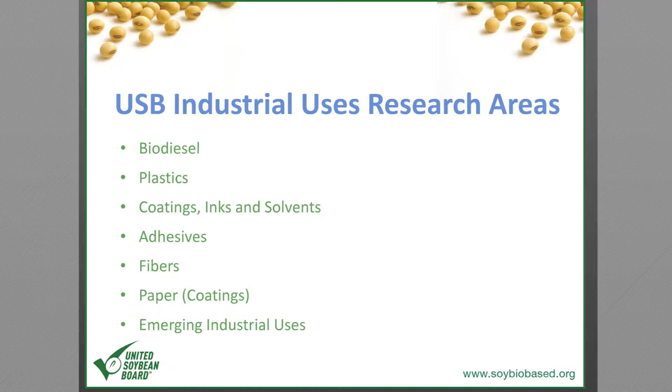We're always looking for new thoughts and new ideas on how we may spend checkoff dollars and bring new products to the marketplace in the future. We've always looked at our organization as having a portfolio. We're looking at a lot of different things, not spending all our money on one item, and we've been successful in many.

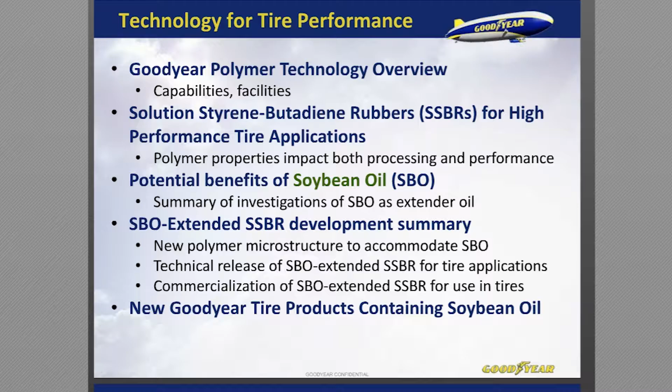I'll talk about the benefits of soybean oil, some of the unique properties that soybean oil has, and how we were able to leverage them throughout the development of a new polymer product and the subsequent introduction into some new tire products from Goodyear.

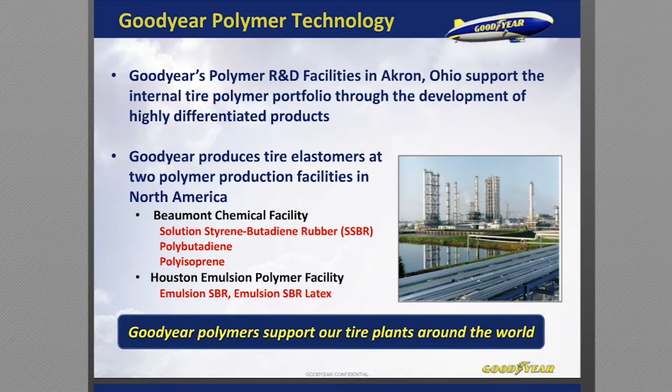As Mike mentioned, I'm Chief Engineer of Polymer Science and Technology, the tire and rubber part of the Goodyear Tire and Rubber Company. We have R&D facilities in Akron, Ohio, and we support some of our polymer plants here in the United States. We have a solution polymer plant in Beaumont, Texas, and an emulsion facility in Houston, Texas. Here we develop and produce polymers that support our tire plants around the world.

Focusing specifically on styrene butadiene rubbers, these polymers are very prevalent in our tread compounds. We have a portfolio of products to serve the global tire market. Every region, every application has different needs and performance requirements, and we're able to develop technology and tailor our materials to meet a full range of tire properties. The use of specialty polymers is ever expanding in the consumer as well as the commercial realm.

One thing that really provides benefit in ultimate properties is high molecular weight of various polymers, and this is where the use of oils and oil extension allows us to process these high performance materials.

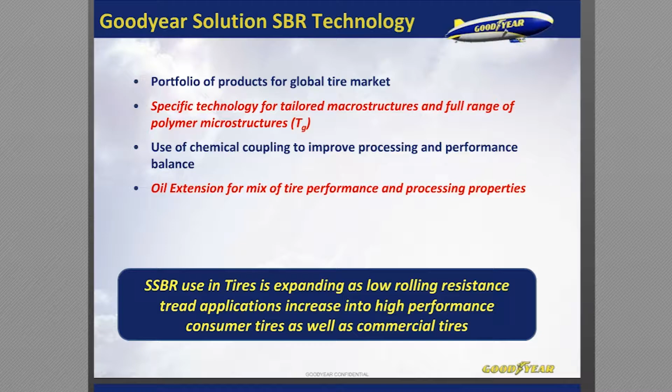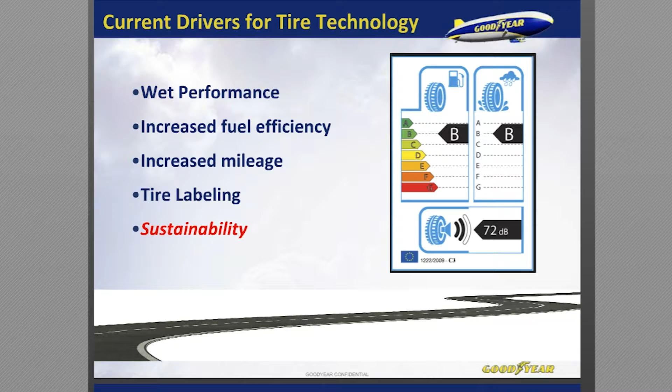In North America especially, we really value treadwear, so there's always a balance of performance that we're trying to achieve. Certain tire applications require more of a focus on one specific technology, and you can see on this list we also have sustainability there. Sustainability is not lost on us. It is very important, something we pride ourselves in, but you can see the overall focus we have on tire performance for our customers.

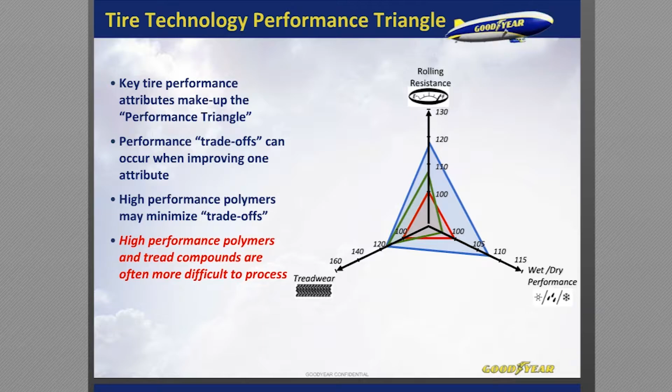And these high performance polymers that we develop are a big part of that. The only issue with these high performance polymers, whether they're high molecular weight polymers or functionalized, is that they are often more difficult to process. So there's always that balancing act as well.

So that's where oil comes in. As I said, high molecular weight polymers, high filler loadings to increase wet traction - all these things we use to improve our tire properties come at a cost of poor processing. So what do we do? We use oil.

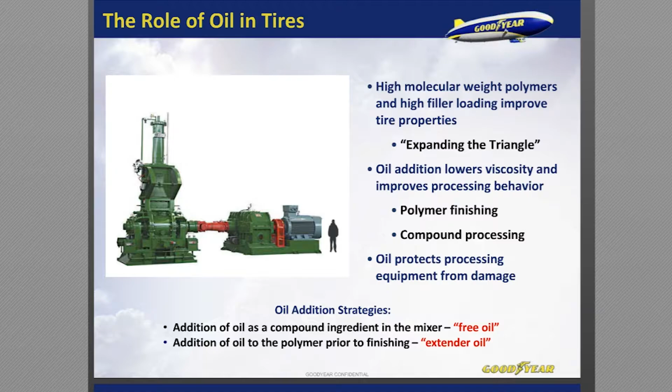Oil addition lowers the viscosity, whether it's the viscosity of the polymer during finishing or added to the compound as an ingredient. There's really two addition strategies. When we add oil just as an ingredient to a compound mix where we're adding filler, different rubbers, and other additives, we add oil directly to the mixer - that is considered free oil. Then we add oil to either polymer cement in the case of solution polymers, or to latex in the case of emulsion polymers, prior to finishing. So basically for solution polymers, it's where the solvent is removed, and that is called extender oil.

So why soybean oil? Why are we looking at this? Why have we continued to develop around this material for the past couple of years? It's appealing because it's domestic, abundant, and renewable. That at least got us looking at it for sure. The sustainability factor was big. In our early development efforts, we started looking to see if soybean oil possessed the key attributes required of extender oil. Thermal stability is obviously a big one - if it didn't have adequate thermal stability, it wasn't going to go anywhere.

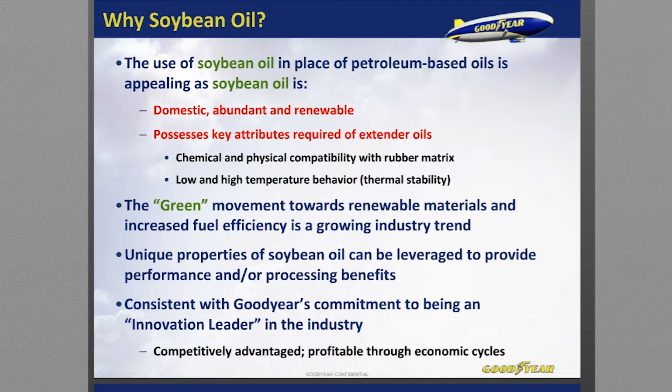And then the physical and chemical compatibility with the rubbers that we use in our tire compounds. The green movement is a growing industry trend, but in the end, it was the unique properties of soybean oil that we were able to leverage to provide a nice balance of performance and processing. This type of innovation is consistent with Goodyear's commitment to being an innovation leader within the industry, which keeps us competitively advantaged and hopefully profitable through various economic cycles.

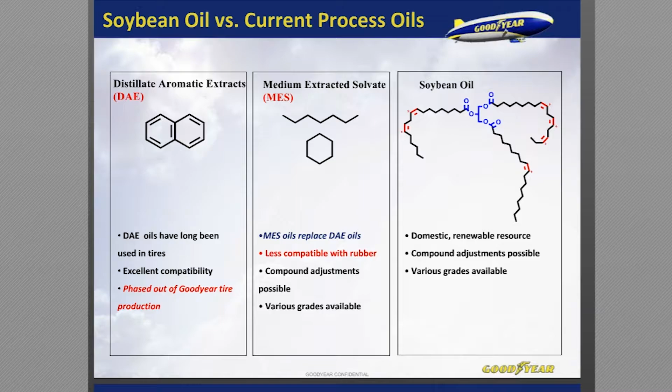Here is a brief overview of the types of oils that are used. The aromatic oils have been phased out over time, so the majority of our oils are these medium extracted solvate, heavy naphthenic type oils. You can see just hydrocarbon oils versus soybean oil, which is obviously a triglyceride - a domestic, renewable resource. The soybean oil we are working with currently is just conventional soybean oil.

Some of our early work was focused on looking at the compatibility of soybean oil with our tire polymers, specifically styrene butadiene rubbers, or SBRs. And the one thing we realized right away was that it had better miscibility - soybean oil was more miscible with SSBR than the current oil we were using.

This is big for us, whether it's as a polymer extender or as a free oil addition - we needed less soybean oil to provide the equivalent viscosity reduction, polymer extension, however you want to put it. But basically, we got to use less soybean oil on a parts level than petroleum-based oil. That's big. It gives us a lot more flexibility in the design of our polymers and in the formulation of our compound recipes.

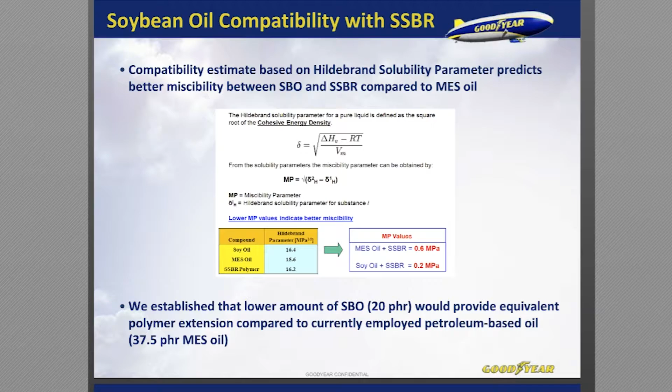What else is unique about soybean oil? Well, since it's a vegetable oil, it's a triglyceride. The glass transition temperature is far lower than traditional petroleum-based oils. The glass transition temperature is the temperature at which a material goes from amorphous to glassy, from rubbery to glassy. So obviously the lower the glass transition temperature, the softer the rubber will stay at these very low temperatures.

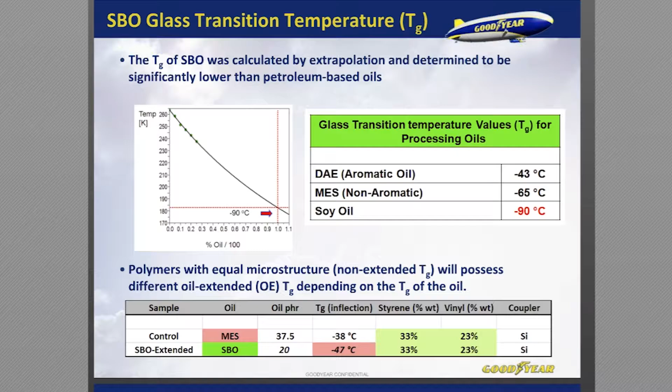Here's a quick comparison of an identical polymer microstructure. We took this commercial polymer cement and added oil to the cement, and you can see here in this TG inflection column a significant shift in the glass transition temperature of the extended polymer when petroleum-based oil was substituted with soybean oil. So why is that important?

Well, what we could do is alter the polymer microstructure to accommodate soybean oil. So what does that mean? We have a current inline commercialized styrene butadiene rubber that is extended with petroleum-based oil. It has a glass transition temperature of -38, and that's all important in our compound formulations, how we put everything together. But glass transition temperature is very important because that really gives us our wet rolling resistance and our wet winter balances in our tread compounds.

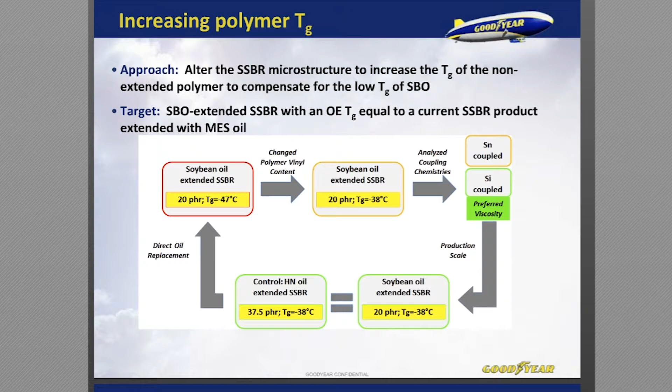Starting here at the bottom left, you see our control polymer, a direct oil replacement, which really shifts the TG. Then we did some polymer development work around it to get the same composite TG, only extended with soybean oil. So what does that do? It basically allowed us to combine a high TG polymer that would be good for a wet application, but given the extremely low TG of soybean oil, we're able to balance our properties a little bit better and make a unique material.

In August of 2014, we achieved technical release of this material, basically showing equivalent performance to the inline, but with noticeable improvements in processing, and that's due to the better miscibility of soybean oil with the rubber.

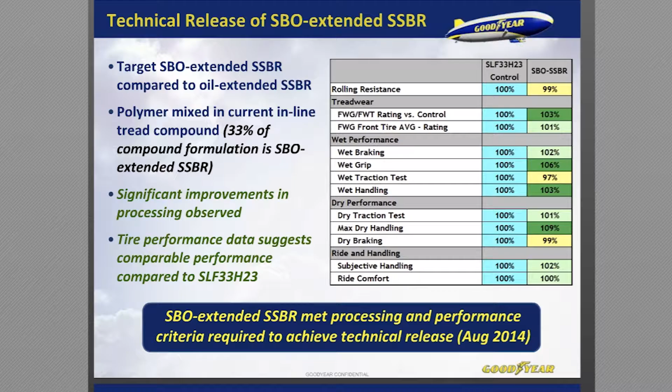We started looking at that material in new product developments. It was an iterative process. A large team was involved with it, cross-functional efforts. But in the end, soybean oil, the combination of the low TG soybean oil with the high TG rubbers, basically allowed us to alleviate the typical trade-offs you get for wet performance and winter performance.

The reason why high-performance summer tires perform so well in the summer on your sports cars and things like that is that they're very soft compounds. But those soft compounds have a very high glass transition temperature, so that in the wintertime when it gets cold, that rubber gets hard and brittle. It's not as pliable, and you don't get your winter traction.

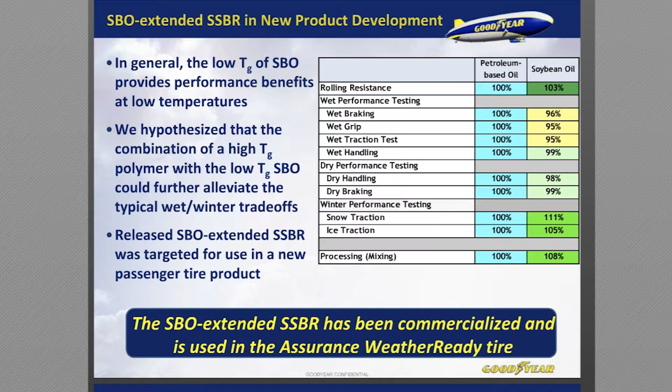Here we were able to achieve both simultaneously, and we were able to use our released soybean oil extended polymer in the Assurance WeatherReady tire. Released last year, the Assurance WeatherReady tire contains a soy-based compound where 100% of the petroleum oil was replaced with soybean oil in the tread compound. That leads to a total petroleum oil content reduction of about 60% compared with a predecessor tire.

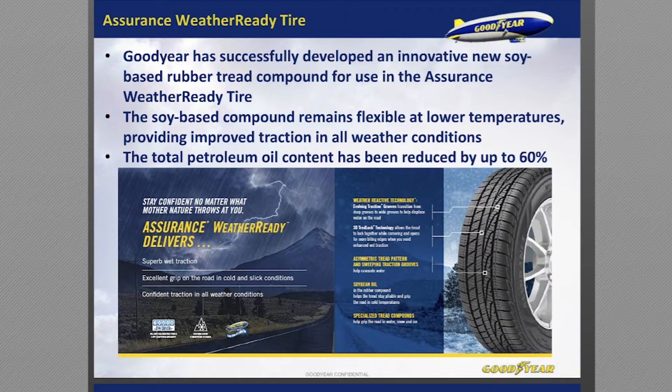Our soybean oil initiative actually won Tire Technology International's Environmental Achievement of the Year. This was an award that we received in February for our work with soybean oil and the development of the first consumer passenger product containing soybean oil.

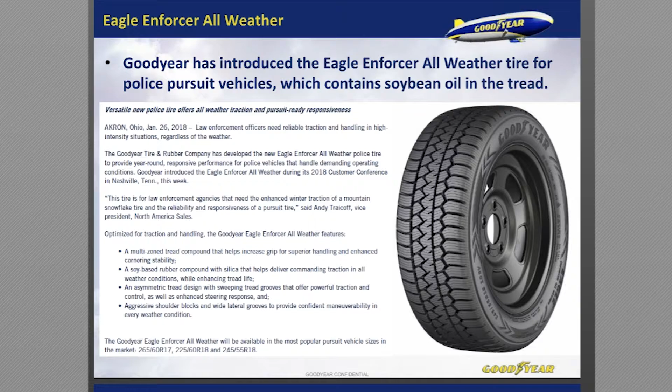About a month ago at our customer conference, we introduced the Eagle Enforcer all-weather tire. This is a police tire for pursuit vehicles, and this should be released later this year. This is another tire where we're looking for premium all-weather traction for our officers of the law. It's vital, all-season performance, and once again, soybean oil was chosen as an enabling technology.

So, in conclusion, we've commercialized 2 new tire products in the past year or so containing soybean oil. The unique properties of soybean oil were leveraged to meet our performance goals, and there are other ways that we're currently looking to leverage soybean oil as well.

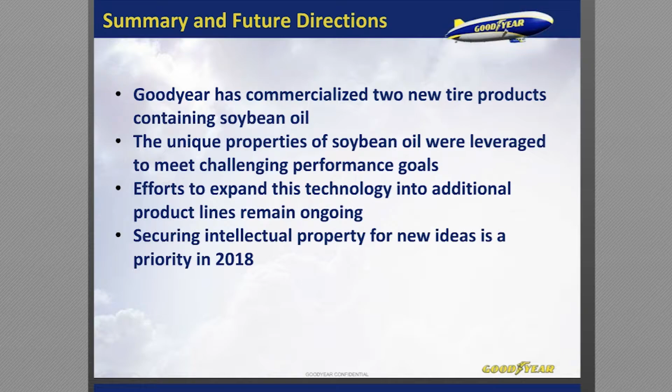It's not just for the wet winter balance. That's how we did it the first time, but so far we're very pleased with the performance of the WeatherReady tire, and we're continuing our efforts to expand this technology into additional product lines. We are in the process of trying to secure some intellectual property for some new ideas this year. We've got a lot of new ideas. There's a lot of work being done right now to really carve out our IP space.

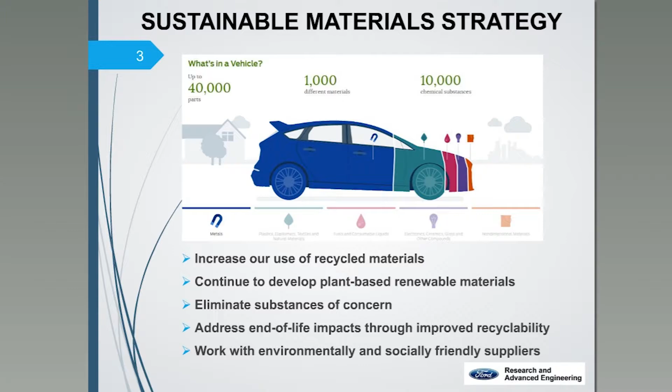With that in mind, how many different materials we're using, we're always looking for ways to increase our use of recycled materials. We want to develop plant-based renewable materials and incorporate those into our parts and onto the vehicle. We certainly want to eliminate substances of concern, heavy metals, etc. We want to address the end-of-life impact through improved recyclability of as many components as possible, and then work with environmentally and socially friendly suppliers.

So it's not just the vehicle itself. We look at the full supply stream and the manufacturing stream, going back all the way to things like mining and the production of raw materials, how we're looking at materials and fuels, how we fabricate, how we actually manufacture, and how we can minimize our impact there.

The vehicle assembly, that includes vehicle assembly as well as the parts and components. How the vehicles are used and maintained, things like oil changes and minimizing the amount of waste produced in that process. And then end of life with recyclability.

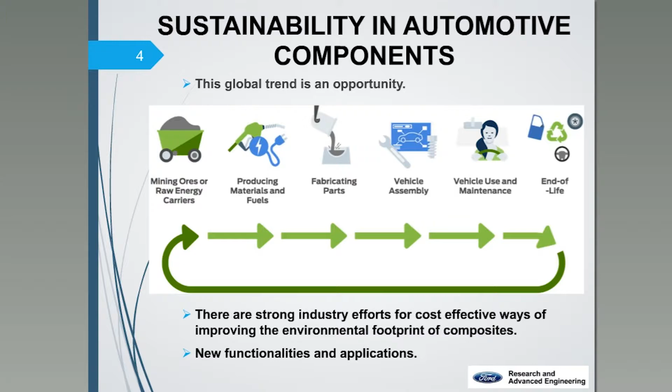We have made huge strides in water usage at our assembly plants, as well as reduction in waste streams. We try, as often as possible in areas such as the stamping plants, to recycle materials called offal, which is the excess material from a stamped part. We try to recycle all of that kind of material. So we're always on the lookout for ways to improve our environmental footprint.

Oftentimes, especially with renewable materials, we find those are also lighter weight, and whenever we go with a lighter weight component, that helps with fuel economy and also improves the sustainability, or sustainable performance, of our vehicles. So on average, Ford is currently using, depending on the vehicle, 20 to 40 pounds of renewable materials. Some locations where we've had great success have been soybean oil-based foams, seals and gaskets. We've used castor oil-based PA11 and foams, and natural fiber reinforced plastics.

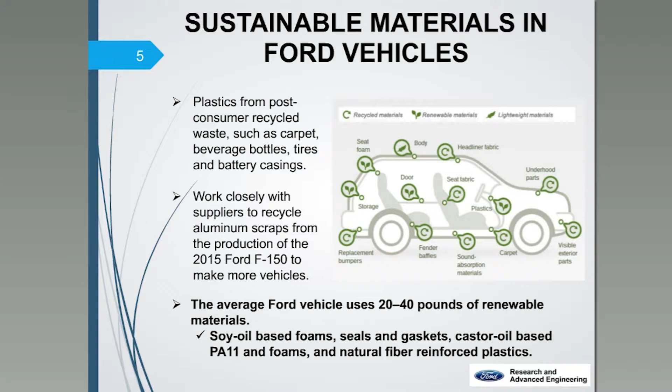So as we try to incorporate some of these very new materials, there's a lot of challenges in terms of performance. It always has to meet the performance expected of the customer and durability. So we need to look at all of our engineering specifications to make sure it's performing properly when we incorporate these new materials. Appearance is one.

Odor is another big one, particularly in the interior cabin, and any volatile compounds that might be off-gassed. The performance strength—there are certain key areas where we have to have good impact, or the part needs to be very stiff, and we can't sacrifice any performance in those regions.

We make vehicles all over the world, so it has to be globally available, or we find various alternatives that are globally available. Moisture sensitivity is another—sometimes sustainable materials take up moisture, so we have to be careful on where we place those materials.

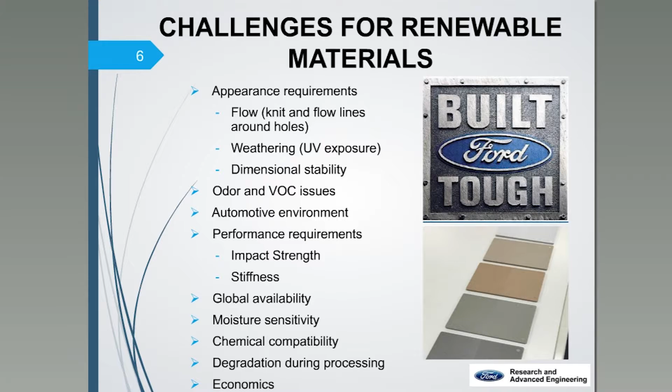Chemical compatibility—many of our parts on our vehicles are exposed to fuels or other chemicals, even people's oils on fingers, etc. So there has to be some chemical compatibility depending upon where the part is being used. We need to make sure as well that it's economically viable and doesn't add to the cost of the vehicle.

Some of the challenges that we have for recycled materials is really the fact that currently there's not a great market for many of these recyclates, and that's part of what we're trying to do—find ways to incorporate some of these recycled materials back into our parts in very specific locations and create a demand for those particular materials.

There's also the economics. There's some raw materials that are so low cost, particularly with lower gas prices or petroleum oil prices currently, that it's really hard to replace those materials with a sustainable recycled part. We expect that will probably change in the future, so we're doing all of our research right now to be ready to incorporate those materials when the economics make that a valuable opportunity for us.

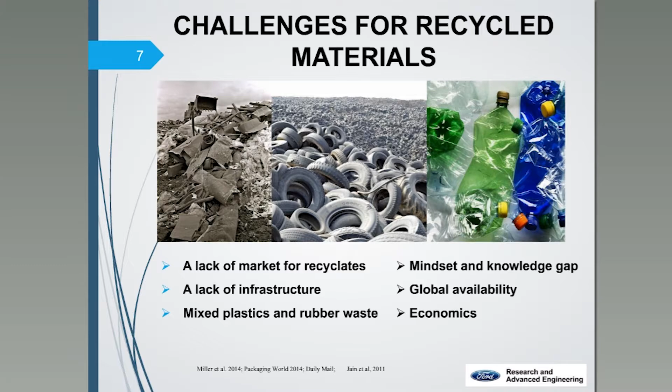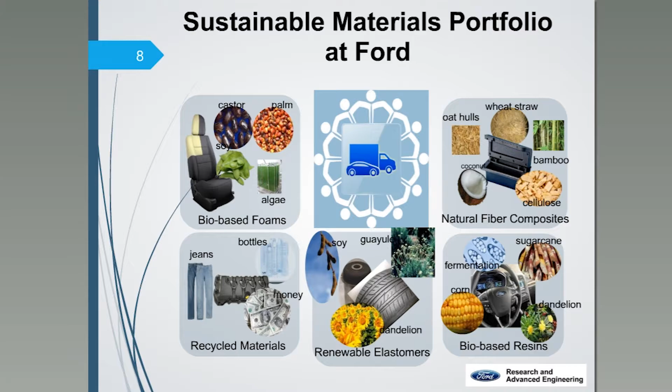Renewable elastomers—we've been looking at dandelion rubber, guayule rubber, and soybean oil, as well as many others that I'll mention in a moment. And then the bio-based resins, looking at different fermentation, CO2 capture for fermentation, sugarcane, corn, dandelion.

So let's talk a little bit about Ford Motor Company's use of soybean oil. We have a very long legacy with soy. Henry Ford was our founder of Ford Motor Company. He really wanted to make that connection between farmers and manufacturing, and so he worked very closely with the local farmers here in Michigan, and really wanted to promote the use of soy.

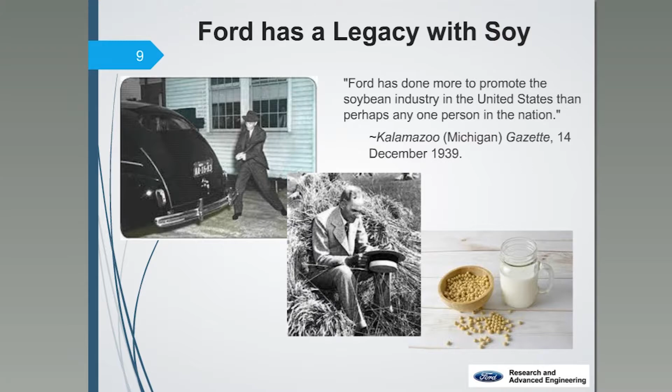Really making the point that you can use this kind of material in manufacturing. The second picture is Henry Ford—he's actually wearing a soybean suit, and he really experimented quite a bit with a variety of different products and how to use soybeans, and was a big promoter of this.

And then what materials have we used here at Ford, and what successes have we had? As Mike mentioned at the beginning of this webinar, the soy-based foam has been the biggest success that we've had with soybean, and we anticipate seeing more of that.

As first OEM, meaning original equipment manufacturer, we led the way in the production of seat foams, and all of our North American production seat foams are made with soybean oil, and 75% of our headrests as well. Then we've used soy foam and recycled tires and gaskets for 14 different vehicle platforms. This has diverted more than 5 million pounds of petroleum out of our vehicle production, which we take great pride in.

We want to make sure we continue to do that kind of work, reducing CO2 emissions as well. That's why we want to continue to promote these kinds of products.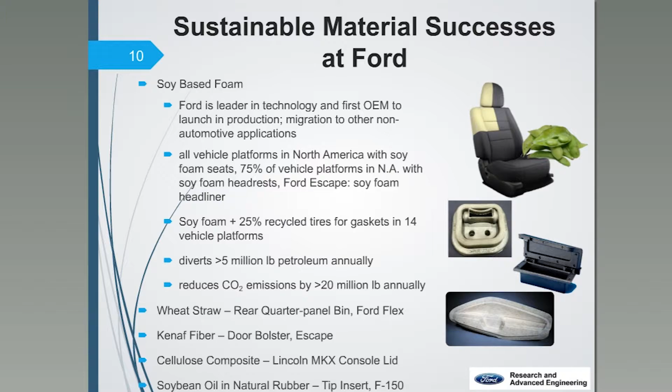We've also incorporated wheat straw into some bins on the Ford Flex, kenaf fiber into bolsters on the Ford Escape, and cellulose composite on our Lincoln MKX console lid. Most recently, we've had our industry first use of soybean oil in a natural rubber part. It's a tip insert on the F-150, otherwise known as a slat pad. I wanted to walk through how we got to that point using this material in that particular part.

Elastomers, rubber—we use those two words interchangeably. I wanted to point out all of the different places where elastomers are used. There's a variety of different types of elastomeric material: natural rubber, EPDM rubber, styrene butadiene rubber, which Bob mentioned, butadiene rubber—many different types of rubber, and they're all over the vehicle.

Oftentimes it's better when people don't notice it, because that means the rubber's probably performing really well, since they're usually in hidden locations you don't notice—seals and gaskets, engine mounts, suspension bushings, hoses and tubing, splash shields, obviously tires. That's the glamour side of elastomer use, door seals and that sort of thing. The average vehicle has about 9 kilograms of EPDM rubber and about 3 kilograms of natural rubber, just in non-tire applications.

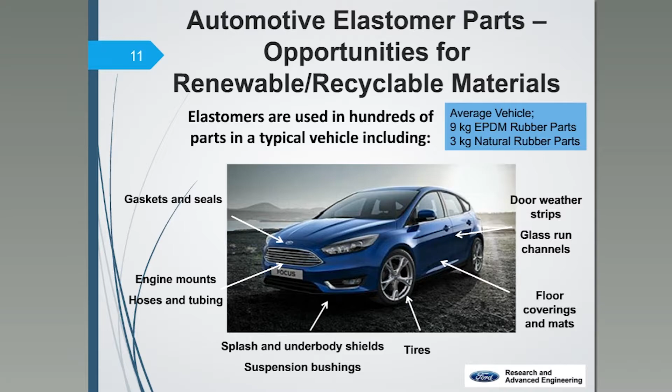This gives you a better picture of some of these natural rubber parts. You can see this rubber is often used when you have two metal components, and you put the rubber in between those two metal components so it provides a smoother ride of the vehicle. There's a lot of dynamic stress on these parts, different frequencies, etc.—suspension mounts, engine mounts, isolators, roll restrictors, bushings, and those kinds of things.

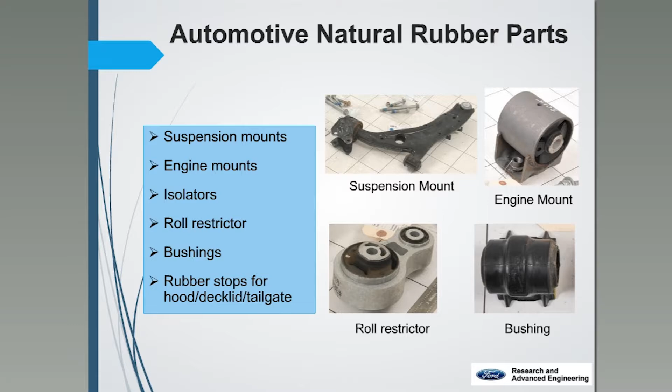When we talk about rubber, it's not just the rubber itself—there are many ingredients that go into making it. We'll start with rubber, the base material, which allows the part to deform and then recover back to its original shape. Bob mentioned the oil, which is important in processing the rubber—it helps with mixing and controls the final hardness of the rubber compound. Another key component is the fillers, reinforcing the rubber, giving it strength, improving wear, and giving the compound its physical properties.

Sulfur is also used, helping to cross-link the rubber to improve stiffness as well as the temperature range of operation. You might have heard of vulcanization—that's what's happening with the sulfur and the accelerators, providing cross-links between the polymer chains that allow the material to deform and come back to its original shape. If you think about regular rubber that hasn't been vulcanized, if it gets too hot it gets very sticky, and if it gets too cold it becomes hard, or glassy. Vulcanization broadens the temperature range of operation so it doesn't get sticky until a much higher temperature, and doesn't get glassy until a much lower temperature.

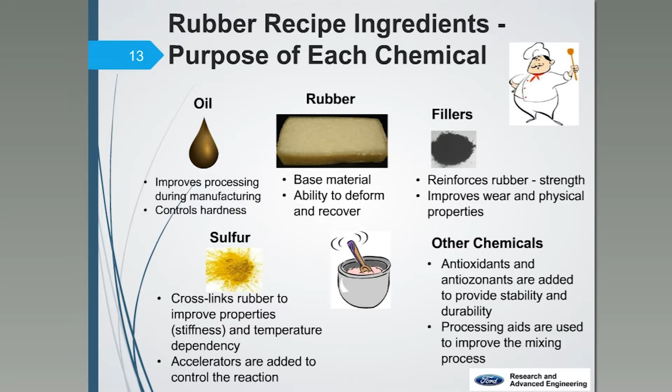This is a typical natural rubber part recipe. We have a funny lingo for how we measure these materials—it's all in parts per 100 rubber. We start with a base of 100 parts of rubber, and everything from that point is by mass relative to the natural rubber. So all rubber recipes start with your base rubber, some sort of filler, some sort of plasticizer, which would be the oil, other chemicals to help with processing or aging performance, and then the curatives. I just wanted to give you an idea of what a recipe looks like.

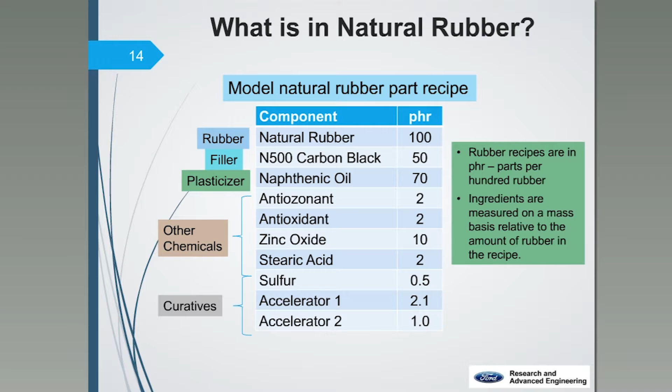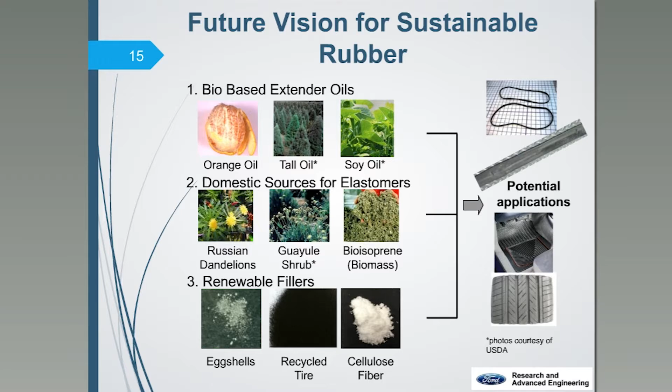When we look at the future for sustainable rubber, we're really looking at bio-based oils—a replacement of petroleum oil with something like soybean oil, which is our preferred option here in North America, or it could be something like orange oil or some other bio-based oil. We're also looking at different sources for elastomers, as well as renewable fillers.

When we go through the process of trying to build upon or create a new recipe that contains new material, or modifying a recipe to contain new material, we really have to go through these 4 steps. We start with the materials development.

We look at the rubber recipe and try to modify that recipe in the laboratory to see how it will mix. From there we go and compound the rubber, go to the laboratory predictors, so we actually test it. Usually we do some Instron testing, some dynamic mechanical analysis, etc., to really understand the physical and mechanical properties that can be attained with the new formulation.

From there, there's a picture here of a tire tester and a tire flat track, but really it could be either a tire itself or a part, an MTS machine for rubber part testing, to see how the actual component performs. Then eventually we have to go to the vehicle evaluation. All new parts are tested on a vehicle for durability to make sure that we're going to maintain the performance of the vehicle itself.

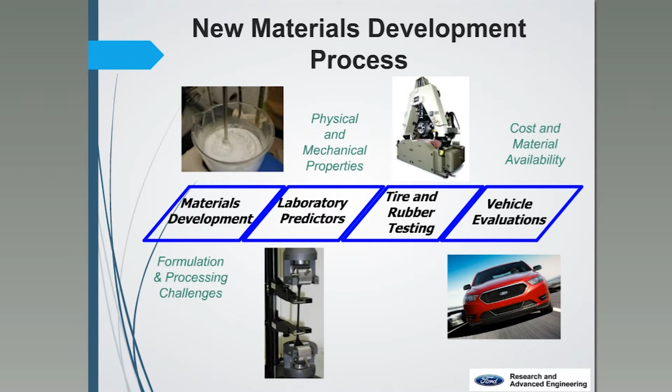Now we're going to get to the F-150 slat pad, the tip insert, which was our first application of soybean oil in natural rubber part. And again, this work is, we greatly appreciate the support of the United Soybean Board. Not sure this work would have happened as quickly as it did without their support.

The key attributes that we're analyzing are the NVH performance, that's noise, vibration, and harshness performance, and the durability. It must be able to survive the life of the truck. And there's 4 natural rubber slat pads per vehicle.

So that was our success. How did we get there? We did work in our laboratory with the formulation. We were replacing the naphthenic oil with the soybean oil. And when we did that and looked at our physical properties, we had a shift in the physical properties when we fully replaced 100% of the naphthenic with the degummed soybean oil.

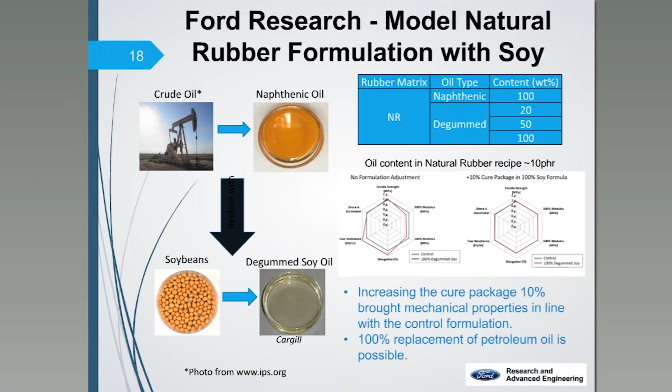We tested it at 20, 50, and 100% replacement. Our supplier partner, Rassini, then took that formulation and tested it themselves, as well as put it into their proprietary formulation. They came up with an ideal replacement of 40% of the naphthenic oil with degummed soybean oil, and you can see that the physical properties met all of our specifications.

So the parts were produced, placed on durability vehicles. After the vehicles ran through their paces, we found that the part was performing extremely well. So new drawings and part numbers were issued.

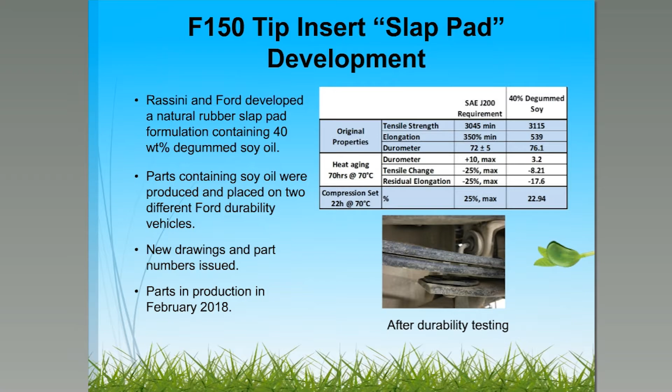All of this work with testing the vehicles and creating the new drawings goes on to other areas within the company, so there are many people involved in this process. Eventually the parts were produced and released into production in February of this year. So there are many different engineering streams involved in developing and implementing new materials.

The benefits of the soybean oil tip insert: a 40% reduction in petroleum oil. We had no compromise in performance, and we're using, in this case on the F-150, 2,700 pounds of soybean oil. But since this is the first part, we anticipate being able to transfer this knowledge to many other parts.

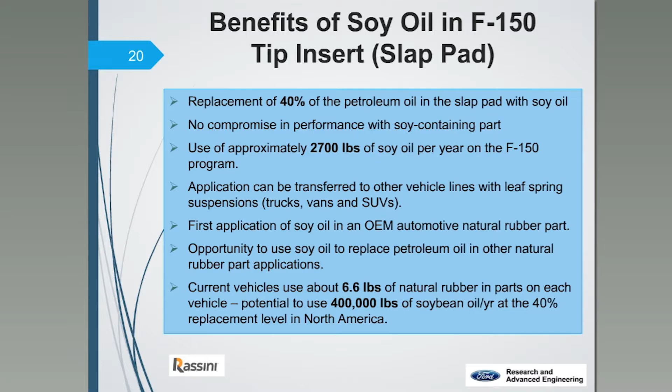As I mentioned previously in this presentation, we use about 6.6 pounds of natural rubber per vehicle. So at 40% replacement of the petroleum oil with soybean oil, we're up to about 400,000 pounds of soybean oil per year. So that's our goal.

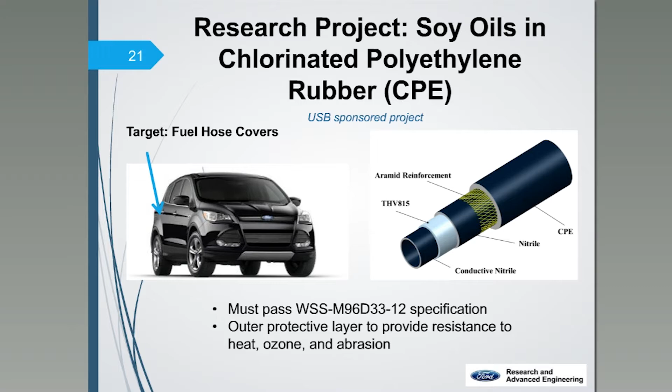Another project, sponsored by the United Soybean Board, is looking at replacing the petroleum oil in the chlorinated polyethylene rubber used in the fuel hose. We've done some testing with our supplier, and it has passed all of the initial testing. There are a few more tests to run to ensure resistance to heat, ozone, and abrasion, and we anticipate launching that in the very near future.

So why are we interested in soybean oil? We certainly need to get away from aromatic oils—they were banned in Europe—but in general we want to move away from petroleum oil as much as possible. In North America, soybean oil is abundant and cost effective for us, and from a green perspective, it offers sequestration of carbon dioxide and a reduced global warming potential.

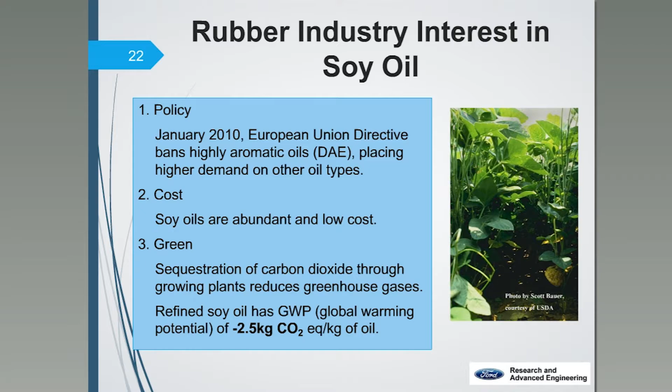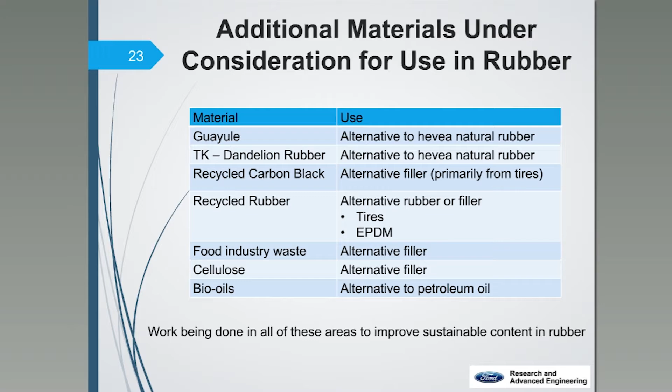Other materials we're considering here at Ford for use in rubber include alternatives to Hevea natural rubber. We're looking at guayule and TK dandelion rubber, recycled carbon black, recycled rubber, food waste as a filler—there's plenty of opportunities there—cellulose, and bio-oils. We're working in all of these areas currently in our elastomers research at Ford.

Regarding the natural rubber alternatives, I wanted to make everyone aware of some new opportunities. We've been looking at guayule, a rubber extracted from the bark of a shrub grown in the desert Southwest, as well as TK dandelion, rubber extracted from the root of the dandelion. That's a very specific kind of dandelion, not the kind that grows in our backyards, but it's showing some really nice potential, and it would be grown in mild regions.

We really want to see if we can find a domestic source for some of the rubber. Most natural rubber currently, about 90%, is grown in Southeast Asia, so we would like opportunities to expand the capability of producing natural rubber here in North America and provide another crop alternative to our farmers. We're partnered with Ohio State University and the Ohio Agricultural Research and Development Center on these projects.

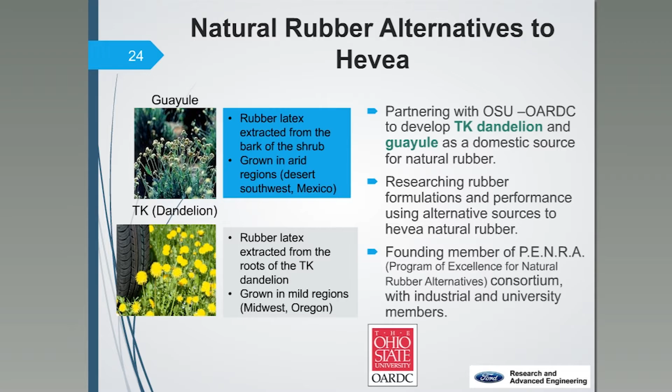We're a founding member of PENRA, the Program of Excellence for Natural Rubber Alternatives. Goodyear is also involved in that program, and we're working hard—our testing indicates that the material looks good. Now it's a matter of making it economically viable.

So the final question here is, do sustainable materials sell cars? Not directly, I guess, would be the answer, but certainly it improves our brand image. It's protecting the business from future unknowns. We want to reduce our environmental impact, and I think the next generation of customers are going to be even more aware of the need for sustainable materials, knowing it's just the right thing to do whenever possible.